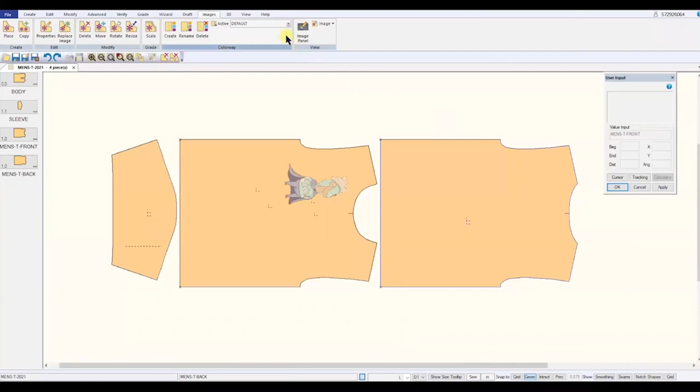I have this default color and a pink color that I've already created. What I'm going to do is go in here and create a new colorway. Let's say my next colorway is going to be blue. Just type in the name.

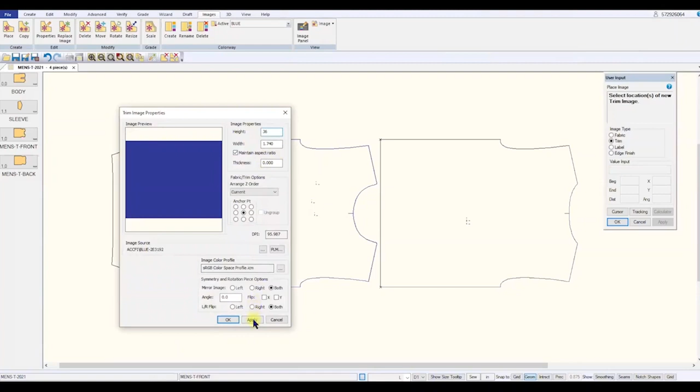What I do is go ahead and add in the fabric color. I just click where the part is that I want to add the color to, and choose the color from my color library. Then I type in the size that I want this color to be. I chose 36 inches so that it would cover all of the graded pieces on this t-shirt part.

Next, I can go ahead and copy those colors to all of the other parts in this model. Then I'm going to go ahead and place artwork on this piece. I'm just eyeballing where I'm going to choose this artwork.

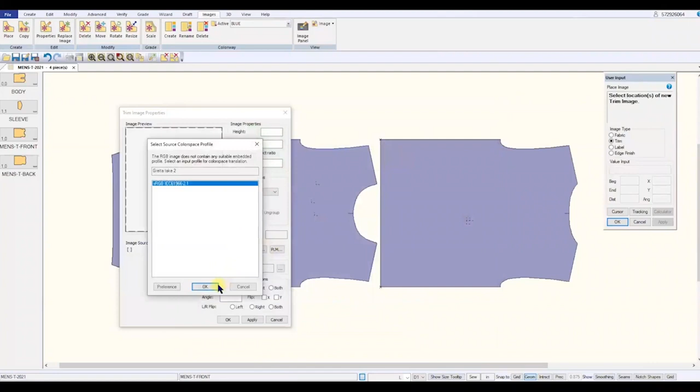Again, I'm in my image library. I'm going to go ahead and choose my artwork file, and click OK. I'm going to rotate it 90 degrees so that it's in the correct orientation. I can see that my artwork is a little bit too big. I can resize it here in this window, typing in maybe I want it to be 15 inches, and apply it. I'll hit OK here, and then manually move this image.

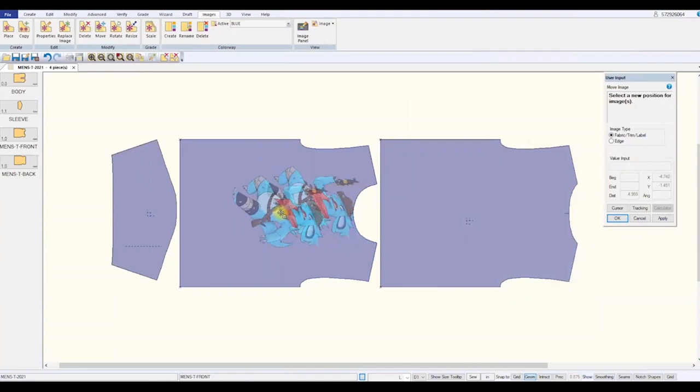So you can move your images wherever you may want them on your pattern pieces. Here I'm just moving it to the middle. Again, in this example, I'm just eyeballing it. I'm going to go ahead and save this. Let's say I'm happy with it, so I'll save it.

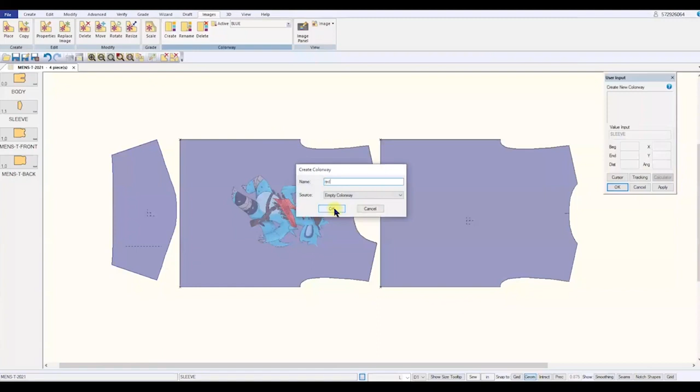Then what I'm going to do next is create another colorway. This is going to be my red colorway. Here again, I'm going to choose the part that I want the color on, and choose the color from my image library. We're going to take this red color here.

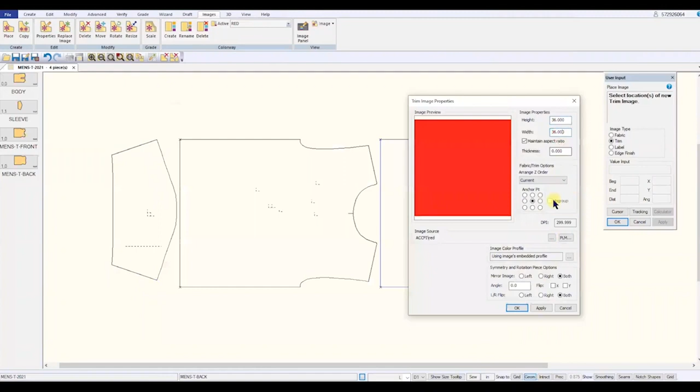Again, I'm going to resize it so that it fits within all of the graded pattern pieces in this style. So here's my red. I'm going to go ahead and copy that to all of the other parts in my model, the back and the sleeve. Then next, I'm going to place the artwork on it.

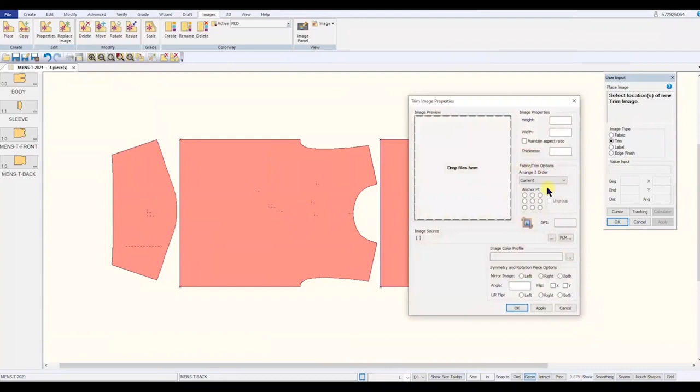Now this time, I'm going to at first eyeball where I want this artwork. I'm going to choose this file called Kevin here. When I place it in there, I'm going to rotate it 90 degrees. This one, because it's got the border around it, is going to be a little tricky to place.

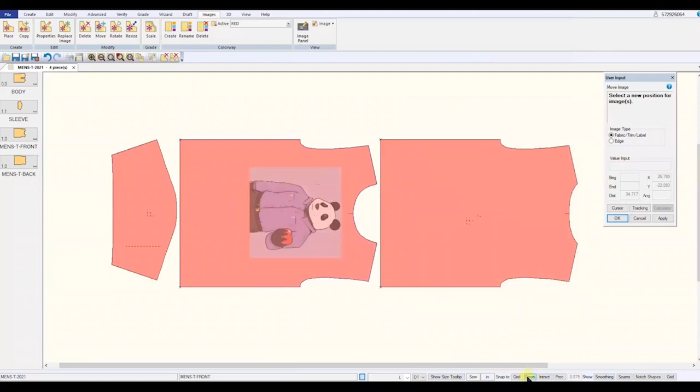I can see that it's not in the center, and maybe I want it in the center of the front of my t-shirt. I'm trying to eyeball it here, but I really can't get a good placement on where I want it. So I'm going to create an anchor point to put this image in. I've created 2 lines, and I'm going to create a point at the intersection of those 2 lines. I'm actually going to go back and delete this image file and replace it so you can see how that's done.

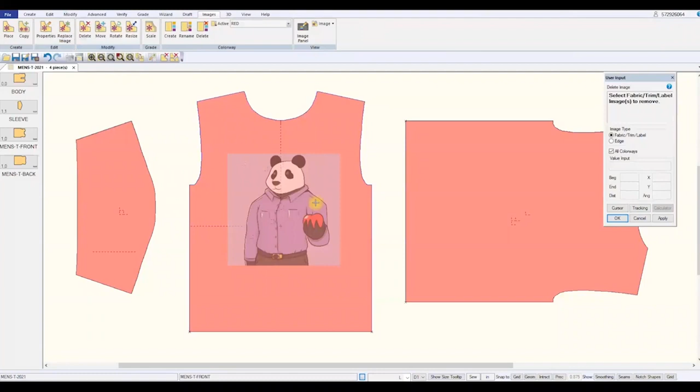So I'm going to delete it, and then go ahead and replace it, selecting that intersection point right in the center of my piece, saying here I want the anchor to be in the center. I'm going to choose that file again and hit OK. I do need to rotate this 90 degrees, but I applied it first and then I'll go back and rotate it. Now I can see that the center of the image is right on the center of my piece. I'm going to go back and delete those lines I don't really need.

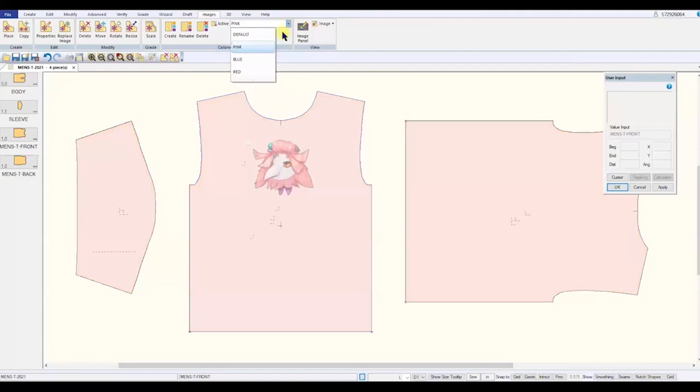And I'll go ahead and save my file. So you can see one of the things we can learn using your AccuMark with the images: placing your fabric colors, placing your artwork, viewing the different colorways that you have. You could also apply stitches, buttons, zippers, other kinds of trims on here.

Once I have these files, the other thing I can do with it is create a marker, a quick marker, by using this costing marker function. I'll put in what I think my fabric width is, or if I know my fabric width, my fabric parts. I just hit OK, and it'll make a quick marker for me.

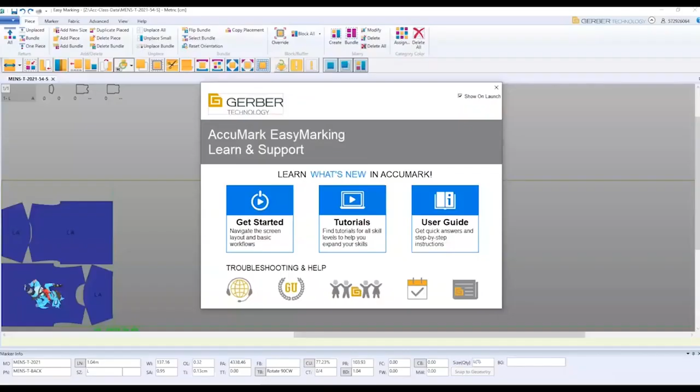And I can export that out as a PDF or an SVG file that could go to RIP software if you had a fabric printer. Here you can see my parts, and they could go to a fabric printer. It created a PDF file, or I chose to create a PDF file in this case.

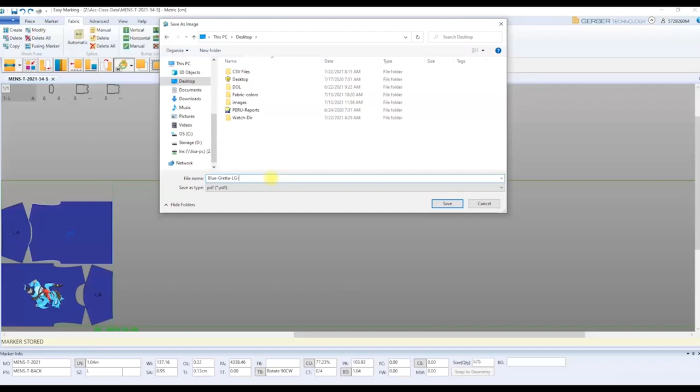And I'm going to open it with a PDF viewer. The other file types are SVG that go to RIP software for fabric printers. Here you can see the different types. They're compatible with Adobe - you could create BMPs or the PDFs.

So then I can go ahead and open this file. There you've got your image files, your pattern pieces, your colorways, and your marker.